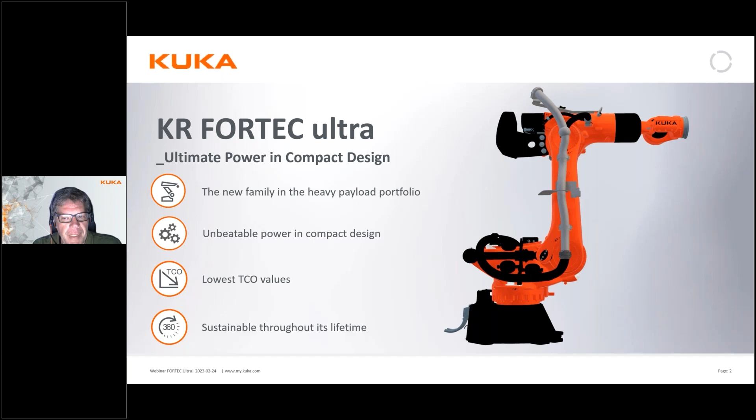The new Fortec Ultra robots are a new complete family of robots in the heavy payload portfolio. It is really a compact and powerful robot. But not only that, we have focused on bringing down not only the cost of the robot itself, but also the cost of ownership, making sure that this is as sustainable throughout its complete lifetime as it possibly can be with today's technology.

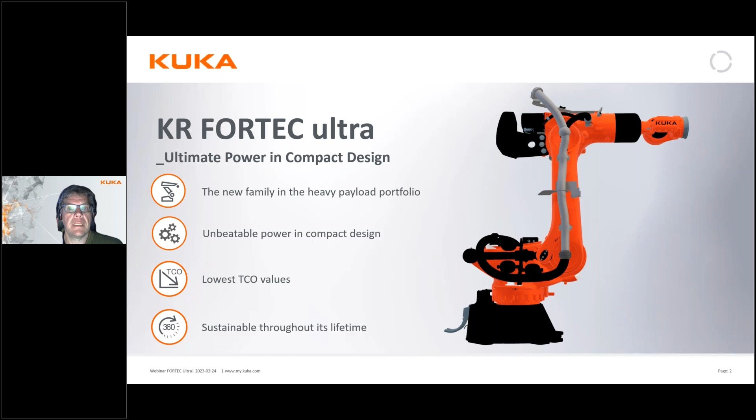A little bit about the background of this robot. One of the reasons we developed it is that there are quite fast changing requirements in the robotics industry today. Typically, parts and tools get larger, bigger, and heavier. That means we need more powerful robots, which can also handle quite big inertia as tools and loads get bigger. That is relevant for all types of industry, not only automotive, but also housing, aerospace, and foundry industries.

We've been in this business for a pretty long time now with heavy robots like this. Actually, this new Fortec Ultra family closes a gap we had in our product portfolio between the older KR Fortecs and our biggest Titan series. If you look at what we call the heavy portfolio, between 360 up to 1300 kilo payload, we now have up to 40 variants in this field. So it's quite an extensive program of heavy-duty robots we can present to you.

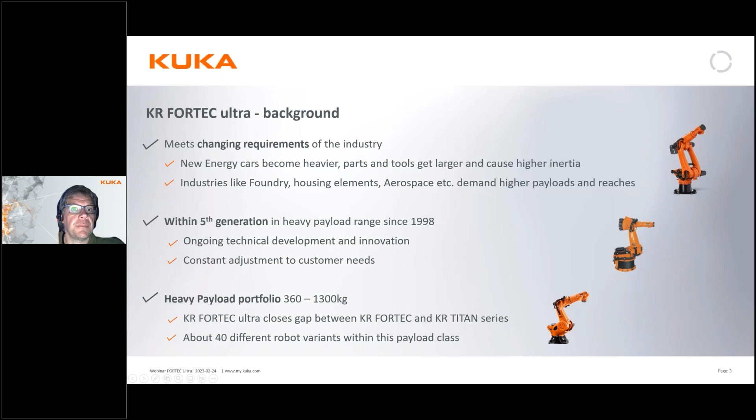Looking more closely into the new KR Fortec family, we can see there are actually 5 variants, ranging from 480 kilo payload with a reach of up to 3,400 millimeters, going all the way up to the KR 800, which takes an 800 kilo payload with a reach of 2,800. There's also a long reach variant for the 480 kilo payload, which actually reaches up to 3,700 millimeters.

There are also special variants available of 2 of these, which are called high inertia. High inertia means we can handle really large tools and payloads which have really high inertia in themselves. This is pretty common in both battery production and foundry production, but also more and more in the construction and building business.

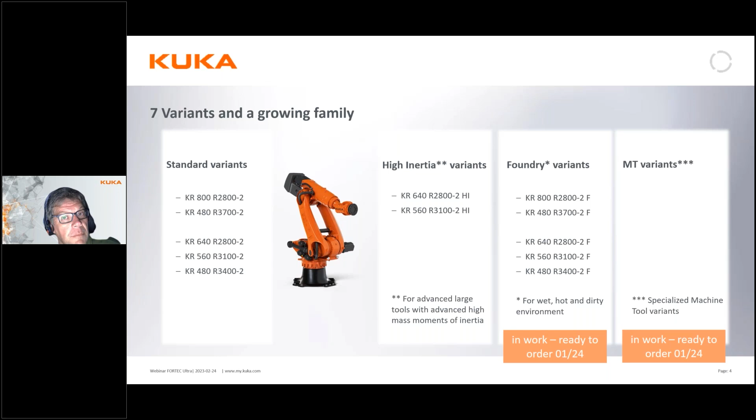At the end of this year and the beginning of next, there will be some more variants of this: the foundry variants, which are specifically developed for the foundry industry, and also the machine tooling variants, which are specially developed to have extra stiffness and so on. This is typically for when you do turning or friction welding.

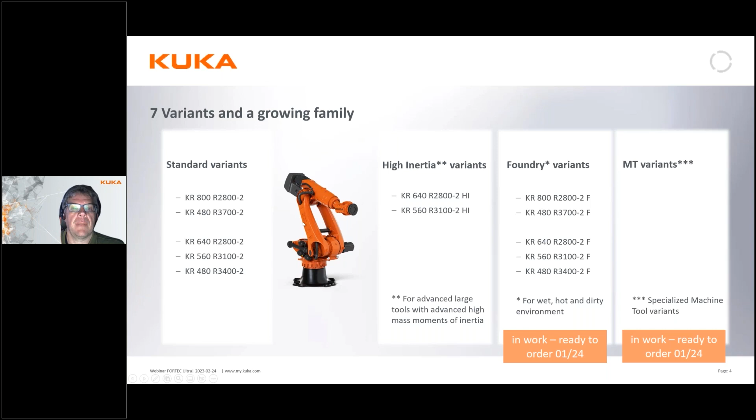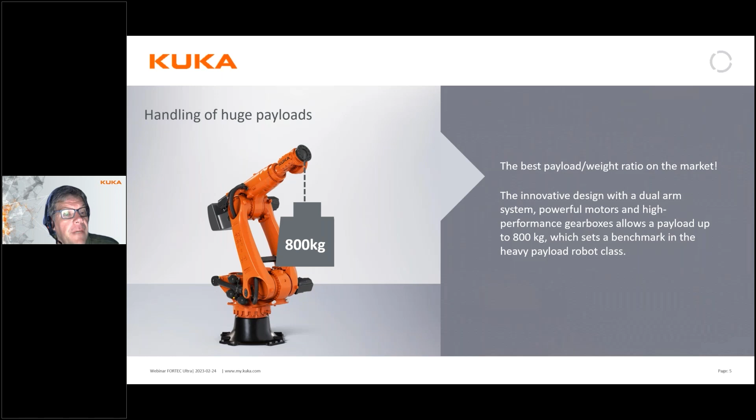Thanks to its pretty unique design, with this double link design, this robot is really a very powerful and very stiff robot, which has absolutely the best payload weight ratio on the market. It also allows us to handle a very high payload with a very light robot in itself. And of course, thanks to stiffness, we're also able to handle quite large payloads, which makes us pretty unique in the market today.

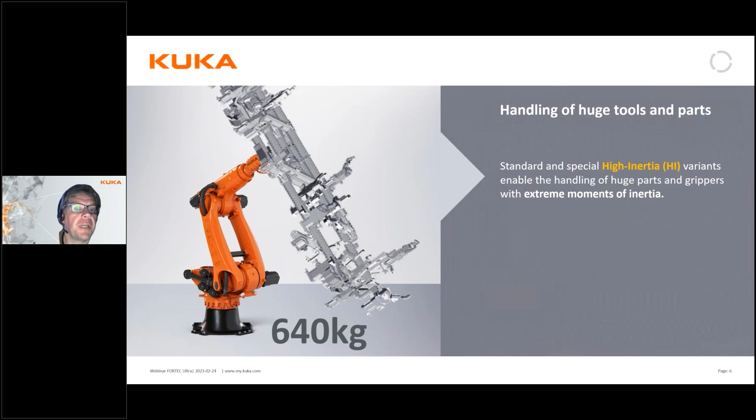We have also done some benchmarking with these robots, and we can actually see that we have been able to reduce the cycle times of the robots and increase the acceleration. That means we can reach quite fast, short cycle times. If we compare this new 640 kilo Fortec robot with the older generation Fortec robots, which could only handle up to 600 kilos, the new one is actually 10% faster in the same cycle.

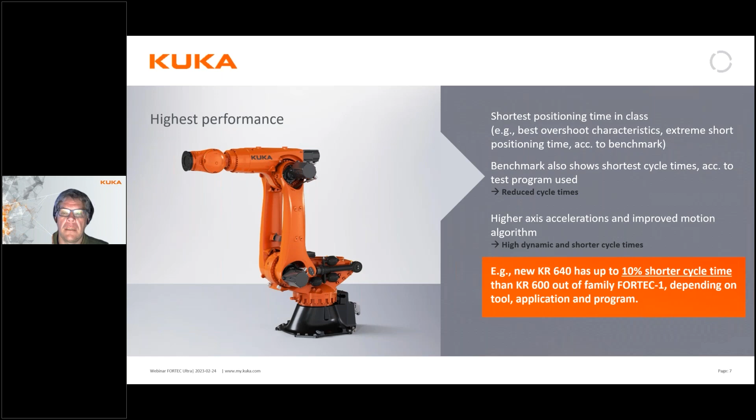Not only the cost of the robot is important, but also the cost of ownership. This is where we put in a lot of effort with these robots. We have actually developed a robot which is the most reliable robot in this payload class.

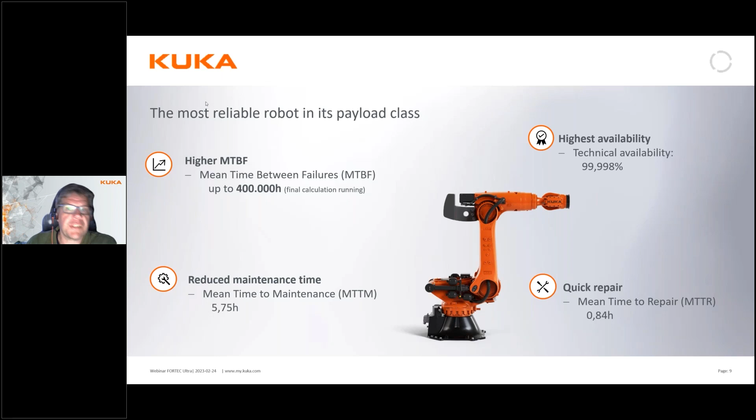What do we mean by this? The technical availability of the robot is actually 99.998%. The mean time between failures is up to 400,000 hours. The maintenance time has been dramatically reduced, it's now 5.7 hours. And the mean time to repair the robot is actually under 1 hour, of course depending on what type of repair you need to do.

How do we then reach this? Well, there are a few tricks up our sleeve. We have selected specifically components with very low maintenance requirements. The internal cable set within the robot is designed to last the complete lifetime of the robot, meaning there is no need to change the internal cabling. The inline wrist of the robot is without belts or cardan shafts, and we have hydropneumatic counterbalancing systems. That means there are no springs to maintain and no necessary inspection by external parties.

Now, we have also performed some changes to the components. There's a new routing of the energy supply system, and we have upgraded the cable protection of it. There is a completely new sealing technology for the gearboxes with a new oil type that should prevent all leakage.

All this means we have brought down the maintenance requirements to only 3 simple actions to perform: a visual inspection, a greasing of the counterbalance system and the cable set, and the oil change, which is only required once every 20,000 hours. And there's just one type of oil, and there's no grease needed to do that.

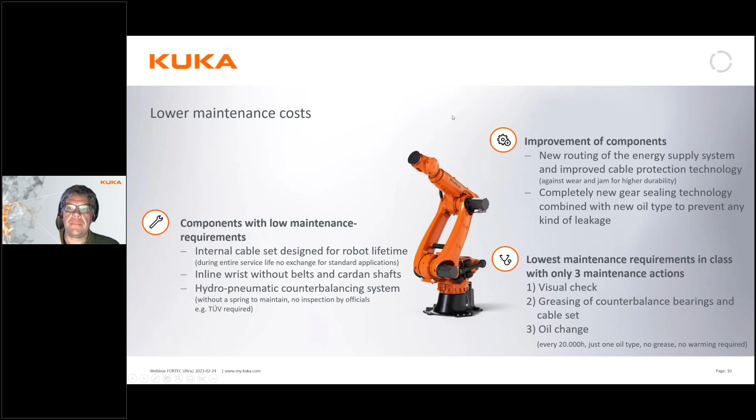And we've also worked pretty hard on reducing the weight of the robot. Thanks to its design, we've been able to do that quite a lot. We'll look a little bit deeper into that. But of course, a reduced mass means a lower energy consumption.

There are also quite few spare parts available. The robot is now built up of blocks of components, which are quite few. And it's very compact for its size of payload.

And actually, when we compare it using the AIDA protocol, which is a standard for measuring energy consumption of a robot over a standardized cycle, we can see that our new robot here, the Fortec Ultra, actually saves 8% compared to our old robots, the Fortec 1, in the same cycle.

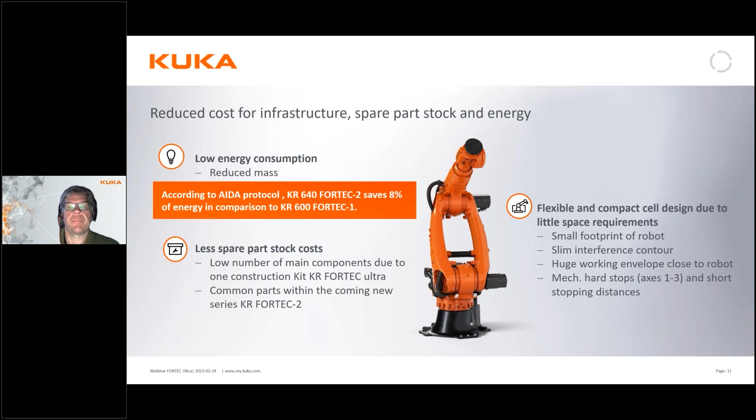So if we look at all this together, we can see that we have improved quite a lot from our older robots. The max payload of that series has gone up from 600 to 800 kilos.

The mean time between failures has dramatically improved. The mean time to maintain has gone down quite significantly, as you see, almost half the time. The mean time to repair has gone down somewhat, and the availability of the robot has dramatically improved.

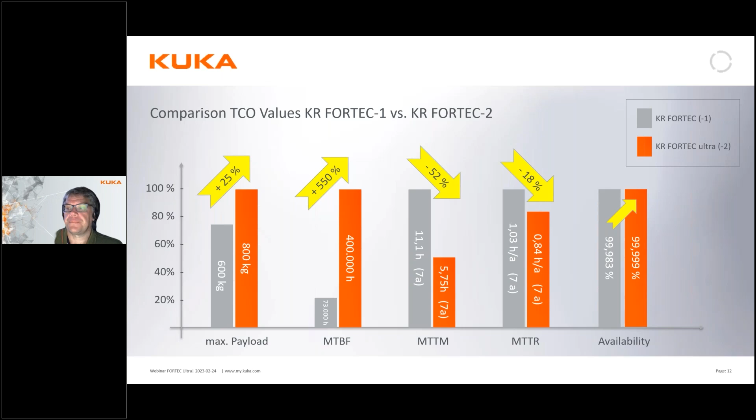You all know that the price of electricity has gone up dramatically, and the fact is that it will probably not drop down to the levels we were used to in any foreseeable future.

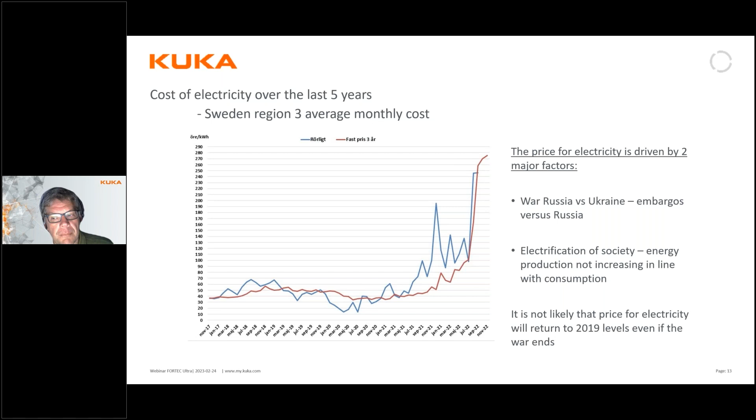And in any robot cell, the cost splits up over the total lifetime. The energy is, in many cases, actually the largest part of the cost over the lifetime of the robots. It could be anywhere between 30 and 40% of the total cost of ownership over the complete lifetime, depending on the application you run.

Where we see our Fortec 1, the older one, which had a maximum payload of 600 kilo and weighed 2.6 tons.

And here we can compare it with the new Fortec Ultra, which we are talking about today, which has a payload of up to 800 kilo, actually slightly lighter than the older one even though the payload has gone up. And if we compare it with its bigger brother, the KR Titan, which has a payload of up to 1,000 or 1,300 kilos, you see that the weight there actually goes up to 4.6 tons, which is a significant change.

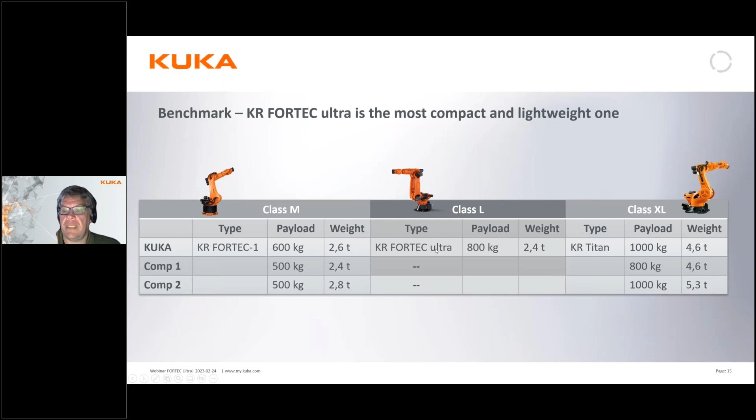That means that we could actually say that our competitors in the 800 kilo class are moving the extra weight of a full car.

And of course, that affects a lot of your costs, not only the energy consumption, but the need for a more sturdy floor foundation.

And as the parts and the robots themselves are heavier, the spare part and service costs are likely quite higher as well. So it has a huge impact on your cost of ownership - the weight of the robot itself. And again, we are more than 2 tons lighter than our competitors in this field.

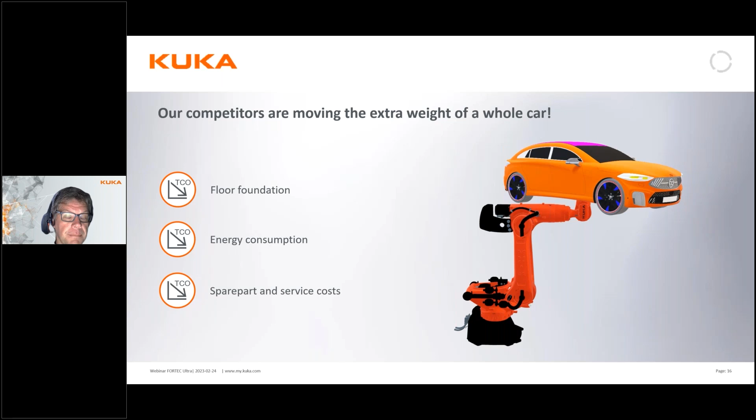But cost of ownership is also sustainability. Thanks to the very modular design of our robots, we can rebuild and reconfigure the robots in the field, giving the robot a new life, which has a big impact on your cost of ownership over time. We can upgrade or downgrade the robots in the field to a higher payload or to the high inertia variants. And the spare parts availability is more than 10 years after the end of the product cycle. We guarantee spare parts availability more than 10 years after the product has been cancelled.

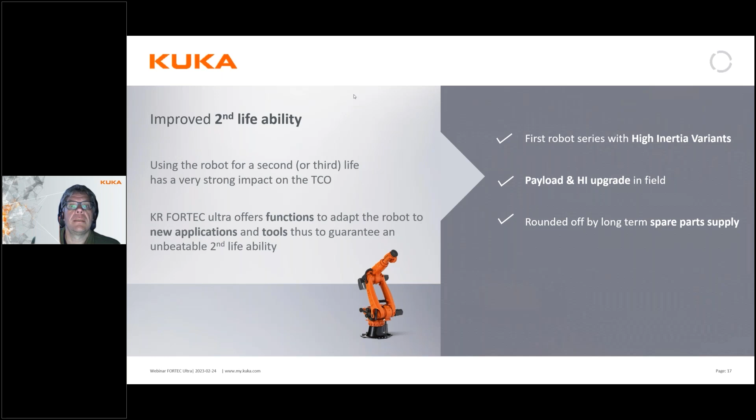So let's bring this together. What we call the Fortec Ultra, we call it from a sustainability point of view a green robot, thanks to its very low energy consumption considering the payload class it is in. This comes from the reduced mass of the robot, and from utilizing the very latest drive, controller, and software technology to make the control of the movements as energy efficient as possible.

And it's a reusable robot. It has a second life ability. We can reconfigure the robot in the field at your site. And we have a very high mean time between failures and a very high robot lifetime.

And if you want to go further in your energy saving, it is DC ready. That means instead of supplying it with AC voltage, we can set it to a DC voltage network and use the regenerative effect of the drives when braking the robot. Instead of burning it away as heat, we can generate electricity and feed it back to the net.

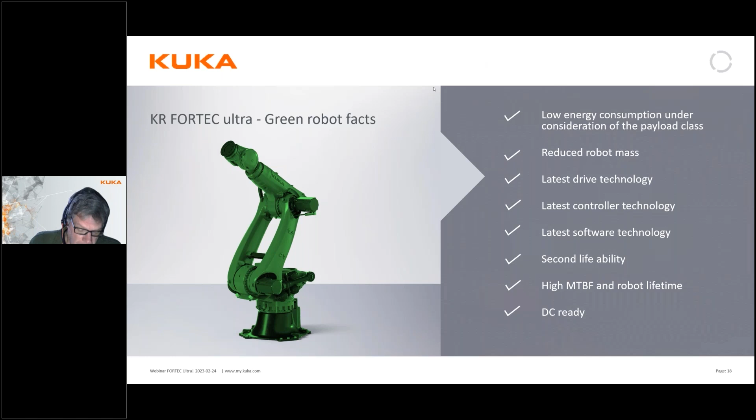So we are nearing the end of this very short presentation of the Fortec Ultra. I think you understand that I could happily talk about it all day.

If you want more information about this robot, it is available on the website my.kuka.com, which requires a registration, free of charge. There you can find all the specifications and technical data of that robot. You will find it under the field. Once you get in on the marketplace, go into robot, heavy duty class, and the Fortec series. There you find not only the presentations and specifications, the data sheets of the robot, but also technical information such as step files, CAD files of the robot.

And if you're thinking about using a robot in this class, you could try the validity of your specific load directly on our website load.kuka.com, where you can enter your payload data with the offset from the flange and get a report on whether this robot is suitable for your specific load. This is available online right now. The robot is orderable right now, and the first deliveries will start in April.